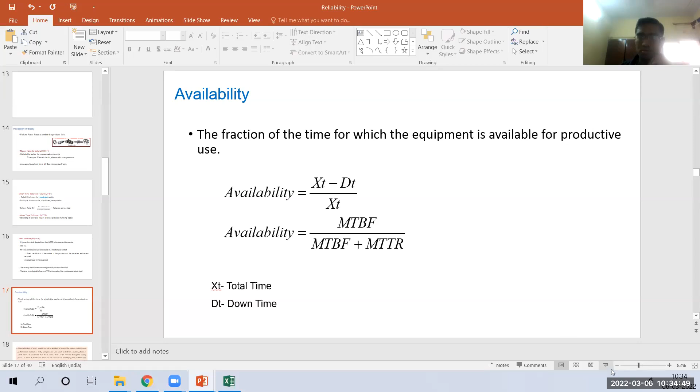Okay, so in our previous session, we discussed the maintenance aspect, and then we also discussed reliability, then the role of reliability in maintenance. That means how the reliability of the system is related with maintenance, and we also discussed the relationship that exists between reliability and quality, and also the role of maintenance planning in the other operations related to shop floor planning. That means it may be related with production scheduling, with quality, or with inventory.

So we have also discussed that maintenance, even though it's the responsibility of the maintenance department, has an effect on production, on quality, and on inventory planning as well. So there is a need for coordination between all these functions. Then it will result in good results as far as productivity for any industry. We also discussed the different measures related to the reliability indexes, that is MTBF, MTTR, MTTF.

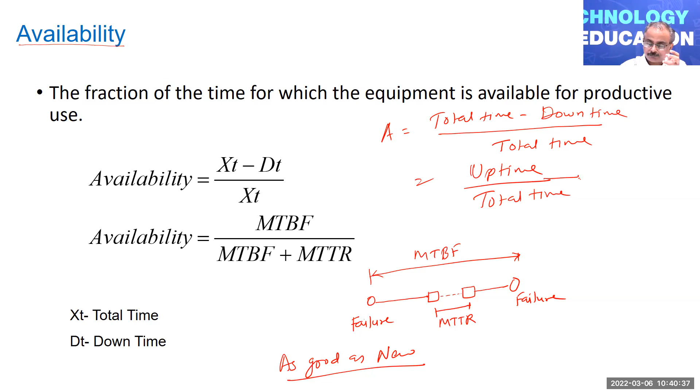Okay, so let's look at this example, and based on that, we'll see how we can evaluate the different measures that we have discussed up till now. That means the failure rate, then the MTBF and MTTR, and how we can evaluate the availability. So it's the example related to a wet grinder, and a manufacturer of the wet grinder tested its product to assess the various performance measures.

The 50 wet grinders were tested for a running time of 1000 hours, and it was found that there were a total of 60 failures during the testing phase. So 50 wet grinders were tested for 1000 hours, so the total duration of the testing was 50,000 hours. And out of those 50,000 hours, 60 failures were observed, and in total, 1,350 hours were lost on account of identifying the problem and restoring it back to the working condition.

So after the failure has occurred, the time that is spent on identifying the failure, we call fault identification, and based on the fault, the machine is repaired and restored back to its working condition. So based on this, now we will try to estimate these performance measures, in terms of the failure rate, the MTBF or the MTTR, and the availability of the particular machine.

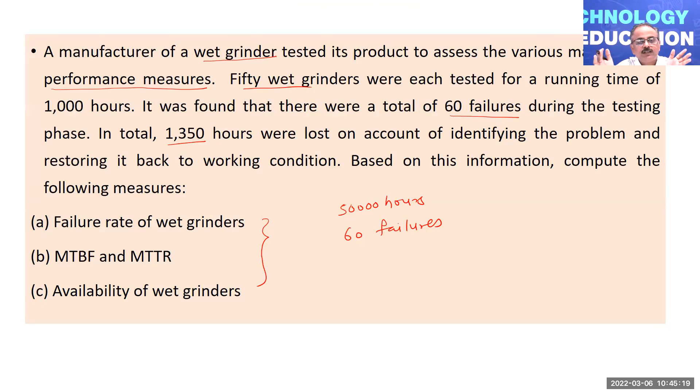Sir, in the formula MTBF, total time divided by number of failures, what is the meaning of total time? Total available time, or the total time including breakdown? So each of these machines is tested for 1000 hours. So the total time of testing was 50,000, and during those 50,000, there were 60 failures. So out of this total time during which the testing was done, total failures were 60.

So the mean time between failures is how much? It is 833. So on an average, after 833 hours, the failure has occurred. So the mean time represents the average time. Total time of the testing is 50,000, and in those 50,000, there were 60 failures. So on an average, after 833 hours, there was one failure, and that represents the mean time between failures for that particular component. Okay, understood, sir. Actually, the doubt is, is it the available time or is it the total uptime of that particular available time?

Which one? 50,000 hours. This total, yes, sir, 50,000 hours. 50,000 hours is the total time. In that case, MTBF should have the formula total uptime, sir. Like total uptime in the sense, whatever 50,000 hours minus that 60 failures are there, no, sir? That we have to go, I think.

So 60 is the number, okay? 60 is the number, but with respect to the 60 breakdowns, there will be some breakdown hours also, no, sir? So total available time minus breakdown hours divided by number of failures should be the MTBF formula, actually. No, but then the time during which the failures occurred, and based on that the repair is being carried out, that will be accounted separately in terms of the MTTR. Okay. So MTTR is included as a part of MTBF. That is correct, sir. That is the repair time divided by number of repairs.

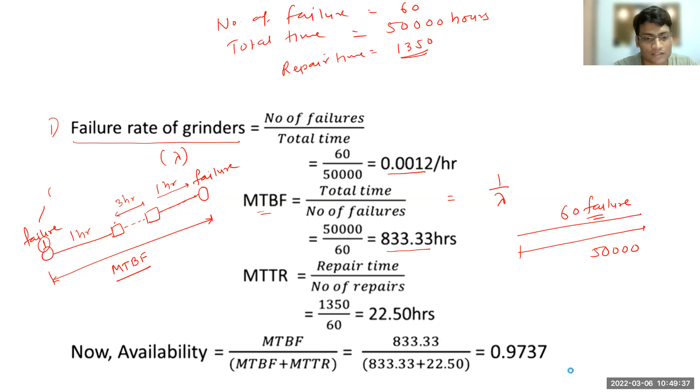Yeah. Okay, so you will consider this total time because MTBF is nothing but the time between the two failure events. Okay, and during the operational period, my machine was operating only for 1 hour. Between two failures, my machine was operating only for 1 hour. So that is why we were thinking it should be 1 hour only. That was our analogy. This is your operating time wherein there is no failure.

Okay. If your machine is operating for 1 hour, see, when you say between failure, what do you mean by it? The time span between two failures. Isn't it? So this is the first failure and this is the second failure. So the time between the two failure events: whatever failure has occurred, you will rectify that failure, you will repair it, you will restore the machine. Again your machine will start operating. After that, the next failure will occur. This time we are considering as the time between failure.

And over the operational period, let's say over a period of 1 month, you will have a number of failure events, isn't it? So you are interested to know the average time between failure, or mean time between failure. So whatever is the total duration for which the machine was operating, and during that duration how many failures have occurred, based on that you will find on average the time between failures. So that time we call the mean time between failure. Okay, if you are considering only the uptime, during uptime there is no failure.

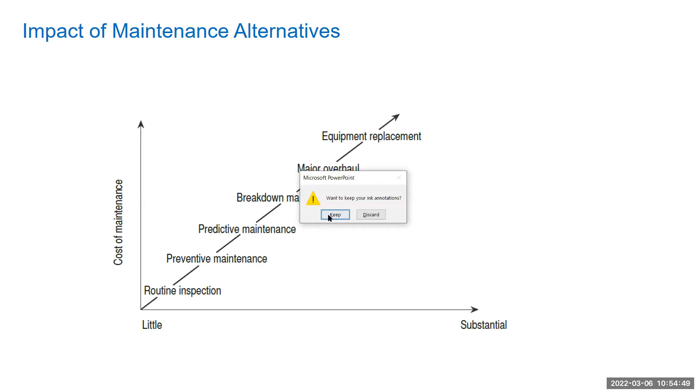Okay. So since we are from maintenance, sir, what we generally do is consider only uptime for calculating MTBF. So that's a bit of confusion actually. Since you are saying available hours, we are considering it as uptime. No, when you say the time between failures, it's over a period of time. So it is nothing but the average time.

So over a period of time, whenever a failure occurs, you will have to restore the machine and bring it back to operating condition. Again, the machine will start its functioning. So whatever operation period you have considered, let's say you operated the machine for 1 month with an 8-hour shift, if you want to know the mean time between failures of that machine, whatever number of failures have occurred over that period will be considered for estimating the mean time between failures. Time to repair.

So even whatever intermediate failures have occurred over a period of time, those failures will also be included. Okay, so we will be interested in knowing the MTBF based on this: here the failure will occur, so basically we consider it as a fault. The fault has started, after that it is identified,

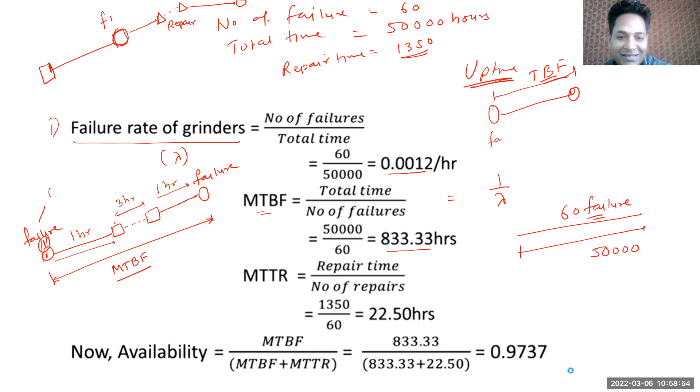Actually, I am also working in a maintenance department in Honda. So we calculated the same way, uptime divided by number of failures. Actually in the SAP system, we have put the same formula. So all our reports are made by this calculation only. So now we are confused. Since you are taking it as total available hours, we are considering only total uptime, sir, actually.

So total hours, why? Because between failures, since the machine has stopped for 3 hours, those 3 hours we are not supposed to consider, no, sir. So only whatever is available, like 24 hours minus 3, 21 hours, those 21 hours we have to consider, I feel, sir, for between failures. Because for the past 8 years we are doing only this, sir. Now we are also following the same as explained, but so we don't get a zero value, we add +1 in the denominator.

Okay, so, but then, okay, I will check the literature again because as far as I know, when we are saying the mean time between failures, over a period of time, whatever failure has occurred, the machines will be restored. And based on the restoring, the machine will again start operating its function. So over a period of time, how many times the failure has occurred will be based on the time that you have considered, and on average, how many failures have occurred during that period. So uptime will include only the failure-free operation of that particular machine.

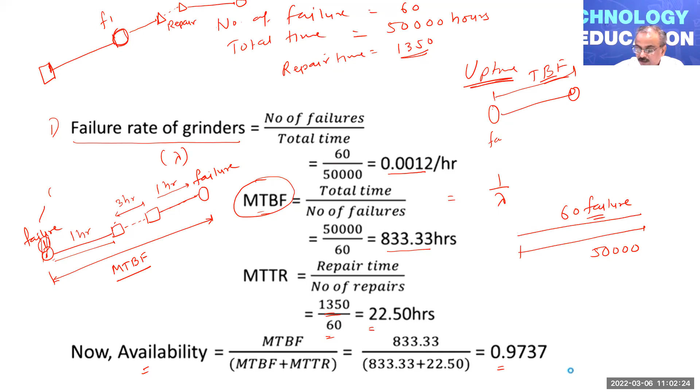So all these are related to the effectiveness of the maintenance function: to what extent the maintenance has been carried out, how it will affect the failure events, which impact the mean time between failures; based on maintenance effectiveness, what kind of fault occurs, and what the severity of that failure will be, which determines the repair time involved, and to what extent the machine will have uptime. Based on that, we can get the availability of that particular machine.

Sir, in aluminium die casting, when the machine breaks down, the temperature of the die and the metal goes down. When the machine is rectified after the failure, the maintenance person says the machine is okay from my side, but production says the machine is not okay because the temperature has not been reached yet. Then in this case, whose mean time to repair will be considered?

If we see from the perspective of production, the machine is not available, but from the maintenance side, the machine is available now. Then see, in a typical die casting operation, for the first piece to become 100% okay, which will meet the entire specification, there is reheating of the die and attaining the required parameters related to the process aspect. So in that particular case, till the time you have restored the machine, that should be included as MTTR.

Because heating of the die, attaining the required temperature, and then meeting the entire specification of that aluminum die cast component, will be a part of the process. So that will not be a part of your role as maintenance, because it's a part of the process. So even if the machine has not failed, if you stop the machine and start it again, the moment the machine is started, it will not give a 100% okay component which meets the entire quality specification for that particular component.

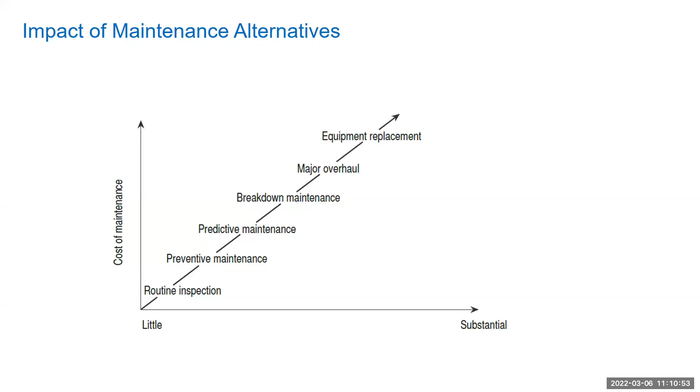Okay, from the production point of view, they will require the workable condition of the machine by which they will produce it, but then it should be accepted by the quality people.

Okay, sir. Thank you.

Okay, so we can see the effect of the different maintenance alternatives that we have seen. So there are different maintenance alternatives. We can start with the routine inspection, wherein we can just inspect the machine and do some kind of cleaning or greasing and lubrication. So you can see that the impact increases in this direction, wherein the cost is also increasing.

So the routine inspection, then the next level will be the preventive maintenance, which will have some more impact than the routine inspection, but of course it will involve some cost. Then the predictive maintenance, wherein you will have some more maintenance in terms of condition monitoring, and based on that you may have to do some kind of the

condition parameter, and based on the observation of the condition of the machine, based on certain parameters, it may be some kind of a noise, temperature or vibration, but of course it will involve a lot of sensors. So definitely you will be able to predict the condition of the machine, and based on that you can take some corrective action. So of course that will also increase in terms of this.

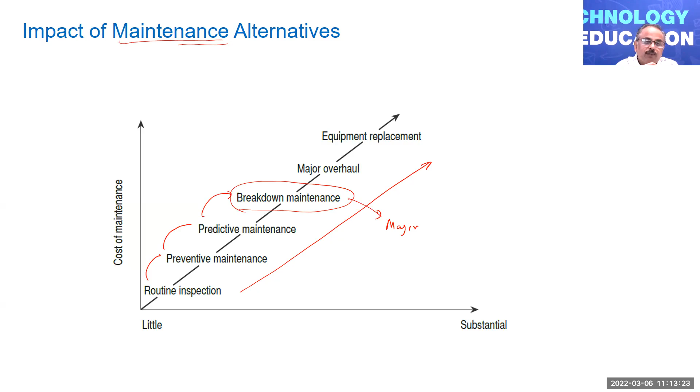The next level will be the breakdown maintenance. So here we are considering that based on the breakdown maintenance, we are doing some major replacement of the component. So in this particular major breakdown, we are not looking at the repair. Okay, we are looking at replacing the component, so that there are many components which will be new components in that particular machine, and based on that it will give the required performance.

So we can say here that replacement of the components is occurring during that particular breakdown, and based on that we will improve the condition of the machine, so that it will have more cost in terms of the replacement of the component.

Then if you are doing the major overhaul of the machine, definitely in that case many components will be replaced, so more and more new components will be involved in that particular machine. So it will have a substantial impact on the performance of the machine, and based on that you will get a good availability, but of course that will increase the cost of maintenance.

And finally we can say that if we are replacing the equipment, then definitely, because over a period of time we can see that the cost of maintenance increases, whereas if you look at the depreciation, considering the depreciation, if you look at the salvage value of that particular machine, it goes on decreasing. Okay, so over a period of time you will see that the operation and maintenance cost increases, whereas the value of that particular machine decreases.

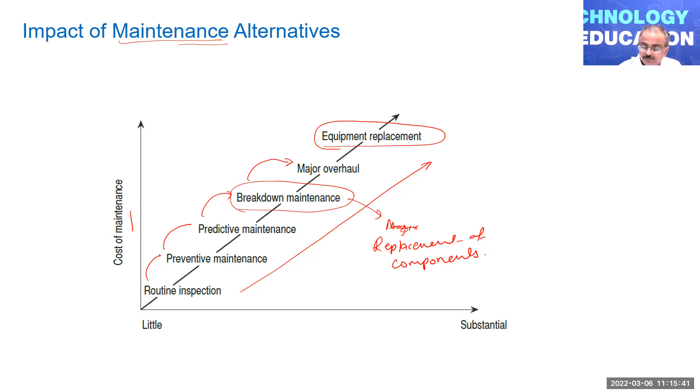So you can see that with this particular level of maintenance, if you go on increasing the level of maintenance, your cost will increase, but then you will get a good amount of productivity in terms of the availability of the machine, and maybe it will result in improvement in the productivity. Okay, so this bathtub curve we have already discussed.

So if we consider the downtime analysis, any downtime will not just involve the active downtime, it should also include the other downtime that is associated. Okay, so many times we consider the MTTR to be only the active downtime during which the machine is under maintenance. That means the machine is dismantled and some kind of maintenance is being performed, and based on that maintenance, the machine is restored to the workable condition.

But apart from the active downtime or the active maintenance time, we should also include the administrative delay time as well as the logistic delay time. So administrative delay time will include the point at which the fault has occurred, reporting to the maintenance function, then the observation by the maintenance people, and based on that, whatever fault has occurred is confirmed. Based on confirmation of the fault, whatever spare requirement or other logistic support is required will also be included as a part of downtime.

And after that, once the machine is dismantled and the entire maintenance has been done, that will be included as a part of the active maintenance time. So in any maintenance, whether it's corrective maintenance, preventive maintenance or condition-based maintenance, it will start with the fault identification and location. That means what kind of fault has occurred, then where the fault has occurred, and based on that, the other administrative and logistic support that is needed.

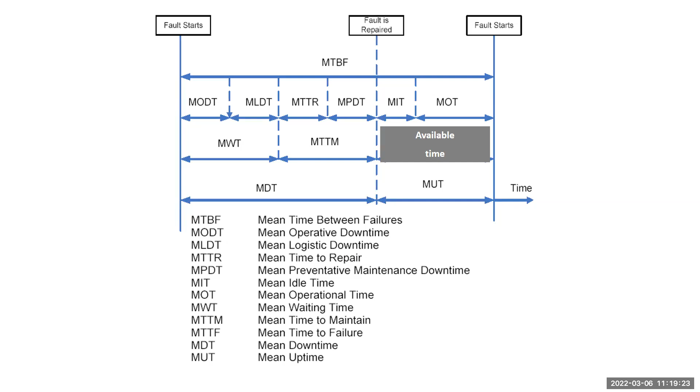Okay, so it may be a preventive maintenance or it may be a condition-based maintenance. So you can see that any downtime, when we consider the mean time between failure, includes these particular total times that we are considering. So the MTBF includes the mean downtime and the mean uptime.

Okay, so at this point the fault starts, and at this point again the next level of the fault starts. Okay, so the time between these two is nothing but the MTBF.

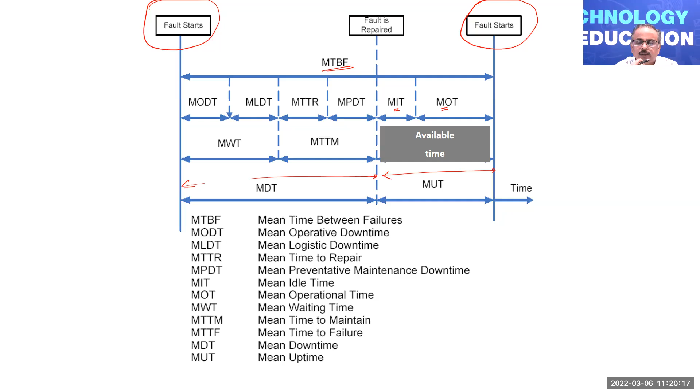So the mean uptime, when we say, includes the mean operating time and mean idle time. So during that particular phase, for any setup change, if the machine is idle, or let's say non-availability of the material, or if anything happens, that will also be included as a part of your uptime. So the mean idle time and mean operating time will be a part of your mean uptime.

And now in mean downtime, there will be two components. One will be the mean waiting time, and the second will be mean time to maintain. Because after the fault has occurred, the maintenance people won't immediately rush to the machine and start dismantling it. So there is some time, which may be related with the administrative time, or it may be related with the logistics support time, if any spare is required, whether that spare is available or not.

Because if any spare is not available, and the arrival of that spare is taking time, that will be a part of mean waiting time. So unless all the resources are readily available, the actual maintenance will not start. So this particular time we consider as the mean waiting time.

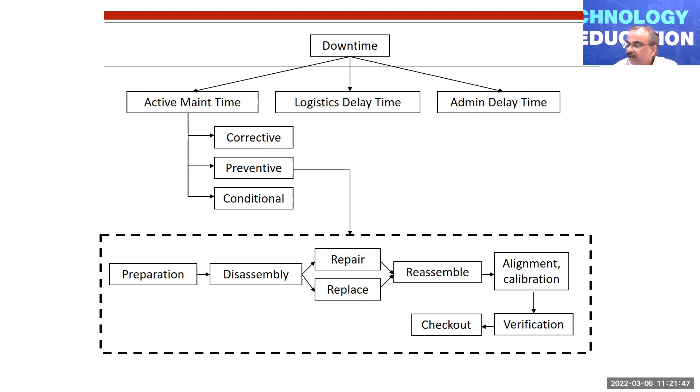And once all the resources required for the maintenance are available, then we'll start the actual maintenance, where you will start dismantling or disassembling the machine, do whatever repair or replacement is required, then reassemble it, do some kind of alignment, calibration, whatever is required, verify the machine, and make it ready for production, so that it will be in a workable condition and the products which meet the quality specification and are acceptable to the customer will be produced. So that will be a part of mean time to maintenance.

So it will include the mean time to repair, and it will include the mean preventive maintenance downtime. So this mean time to repair will include any intermediate repair or adjustment if required, and if any preventive maintenance is being done, that may also be included as a part of your mean time to maintenance.

Okay, so this total downtime will have so many components. So you will have to look at which component is increasing. That means it is causing more downtime, by which the performance is being affected, and based on that you may take some corrective actions.

So you can see that when we say the uptime or the downtime, there are so many components included in those which should be looked at, so that it will improve the performance of the maintenance, and based on that you can improve the productivity of the particular manufacturing operations or functions, or improve the performance related with the availability, uptime, downtime, or the other performance measures that are looked at in any manufacturing function.

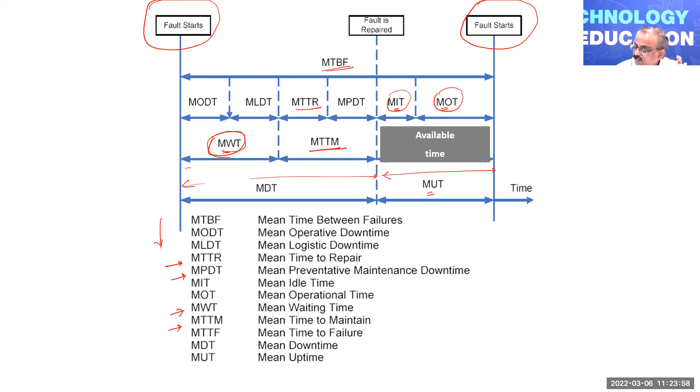So the availability of the data required for doing the analysis is based on a kind of information system. So the maintenance function should have an information system. That means for all the functions involved as a part of the maintenance, and whatever corrective actions or activities are involved, there has to be some system which will record all this, so that you will have data available, and using that data we can further improve the performance of the maintenance function.

So a good information system is required for the efficient operation of the maintenance function, to arrive at the different parameters associated with the maintenance. For example, if you want to come up with a maintenance policy, whether it will be an age-based policy that we have discussed, a periodic or time-based maintenance policy, or another policy in terms of the repair limit, the failure limit, opportunistic maintenance or selective maintenance, whatever maintenance policy we want to adopt, we should have data available.

Because if we want to go for an age-based maintenance policy, in that particular case, we should have the failure history of the particular machine, showing which component has a certain age after which it fails. So that kind of analysis we are able to do.

So maybe based on that, we can come up with either an age-based policy, or maybe with the failure limit policy in that particular case, or which component is taking time for repairing. So if over a period of time the repair time of that particular component exceeds, in that particular case we can take a call that instead of repairing it now, we can replace the component, so that it will start a good performance.

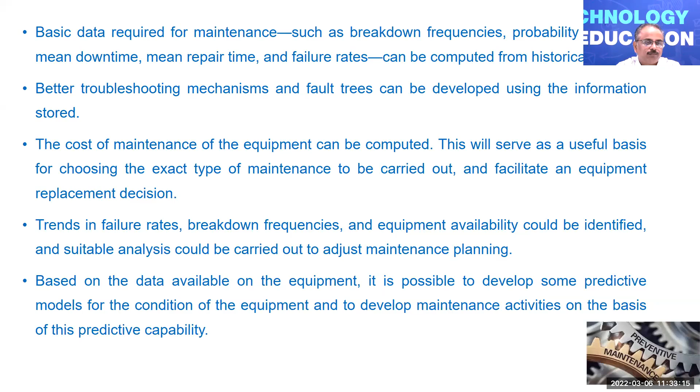It's 11:30, and after that we will resume the session, and we will look at the waiting line principle, because in machine maintenance, the machines will be undergoing maintenance, and a long queue is formed. So based on how much time the machine will spend, you can plan for the resources and do planning for your maintenance function. So we will look at how the waiting line concept can be applicable in machine maintenance after the break is over.

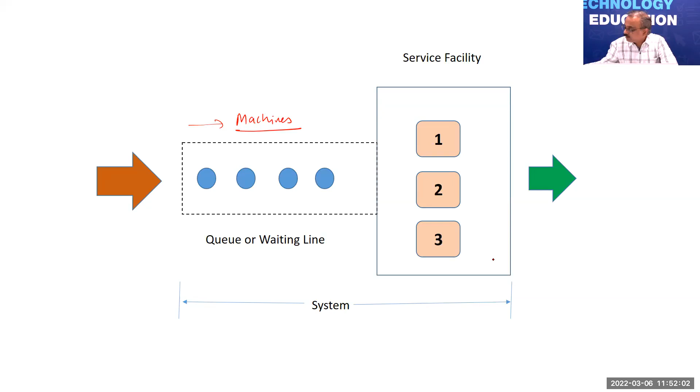Here there will be a number of customers arriving. For maintenance, the customers are nothing but the machines that will be arriving and available for maintenance. The service facility is nothing but the maintenance department, wherein there will be a number of service facilities available. It may be in terms of the maintenance people or the maintenance team. So depending on the organization structure of that maintenance department, you will have the number of service facilities available. So the machines will arrive at the maintenance function.

The machines, based on their failures, will form a queue, and based on the service given by the maintenance department in terms of the maintenance carried out, the machines in workable condition will come out of this queuing system. So we can analyze the number of machines waiting for service in the maintenance function as a part of waiting line or queuing theory.

And based on that, we can decide how many machines are waiting and what will be the time that will be spent by the machine in the system. So all these we can evaluate.

So for any waiting line, there will be 3 elements involved as a part of the queuing system. The first will be the customer who will be arriving at the service facility, that means here the maintenance function. There will be a queue formation, because based on the arrival of the customers the queue will be formed, and there will be a service channel, which is nothing but the maintenance function. So depending on these 3 elements, we can analyze the maintenance as a queuing model.

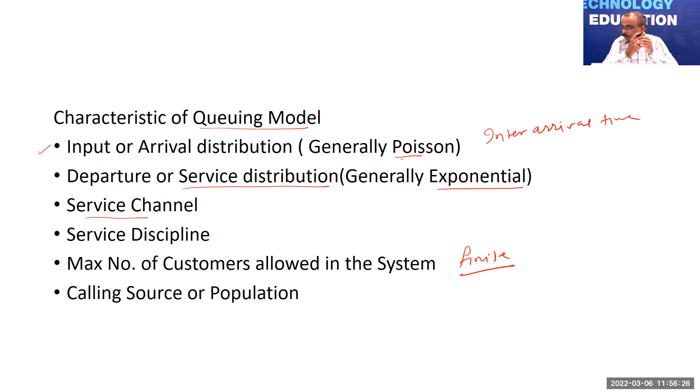In queuing theory or in a waiting line, an infinite number of customers may be allowed. For example, if you consider any bank, or any reservation system at a railway station, or even a dispensary where the doctor is giving the service, the number of customers arriving at the service facility will be from the infinite. So that is the maximum number of customers allowed, and then the calling source or the population.

So from where the customers are coming, again it will be finite or infinite, from which population the customers are coming. In case of maintenance, whatever number of machines are available in that particular organization, those will be coming for maintenance. So the population we are considering here will be the number of machines in the company, and in that case it becomes a finite population. But in other situations where the customers come from an open population, we consider it an infinite population.

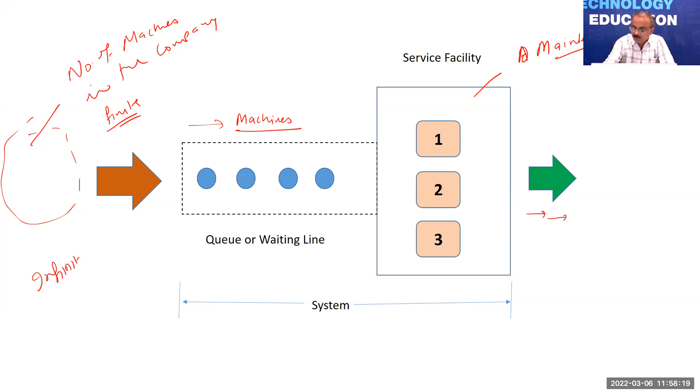So depending on the combinations of all these parameters, there are different models that exist for the waiting line, and based on that, we can have different formulations of the waiting line. We will consider this multi-channel system wherein a number of machines will be arriving, and based on the number of facilities, the machines will be maintained, restored, and then sent again to the production function.

So in that particular case, lambda here is the arrival rate, and mu here is called the service rate. So this lambda is based on the Poisson distribution, and this mu is based on the exponential distribution.

So based on the values of the lambda and the mu, that is the arrival rate. For example, in case of, let's say, the machine shop wherein the machines are operating, and based on that, the machines are getting into the maintenance department. So on an average, we can say that the arrival rate is, let's say after every 1 week, or let's say after every 10 days, one machine is arriving for the maintenance. So it's called the average time, or we can call it the mean arrival rate of that particular service channel.

Similarly, the mean service rate, that means how much time is being taken on an average to provide the service. So that is being considered as the service rate, which we call the mean service rate, and this we call the mean arrival rate. So this utilization factor is nothing but lambda upon mu, that means arrival rate divided by the service rate.

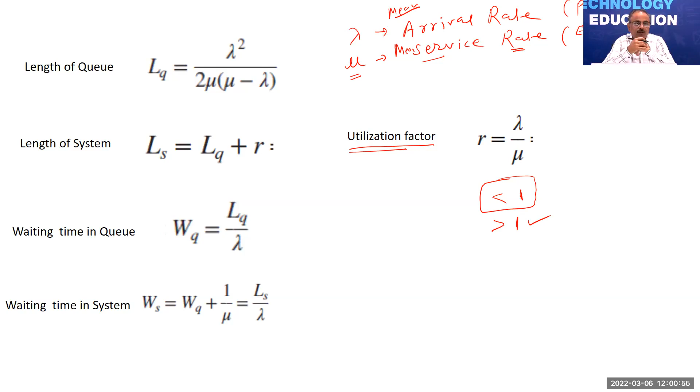So you have to ensure that the utilization factor should be less than 1. In that case only, it will result in less number of customers in that particular queue. Otherwise, if it is greater than 1, then it will result in an endless queue. So based on that, you'll have to take measures by which you can increase the service rate. Maybe you can create a few parallel facilities to improve this utilization factor and bring it back to less than 1, so that it will become a finite queue length. Otherwise, it will become an infinite queue length.

So based on the mathematical analysis, the length of the queue that is formed will be given based on what is the arrival rate and what is the service rate. So this will be the queue, and this will be the system. The queue will include the number of customers, in this case the number of machines which are waiting for the maintenance, and the system will include the queue as well as whatever machine is under maintenance. So that will be considered part of the system.

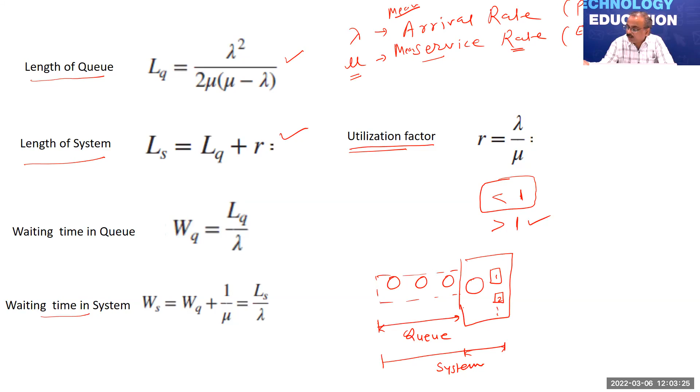So in any queuing line, we are mainly concerned with these 4 important measures: length of the queue, length of the system, waiting time in the queue, and waiting time in the system. And of course, what is the utilization factor for that particular service channel or service system. And we have to ensure that the utilization factor is less than 1. Otherwise, it may result in an infinite queue length.

Okay. So let's consider this example, and based on that, we'll see how we can estimate these different elements related to the maintenance function, applying the queuing line or waiting line theory. So a machine shop has several multi-purpose machine tools, and the arrival rate is 1 every 18 hours. So this is the arrival rate. So on an average, after every 18 hours, 1 machine arrives for maintenance.

The MTTR is estimated to be 14 hours. And the MTTR, that means service rate, will follow the negative exponential distribution, and the arrival follows the Poisson process, because the arrival pattern is normally a part of the Poisson process. Because there will be intermittent arrival of the number of facilities or the number of customers

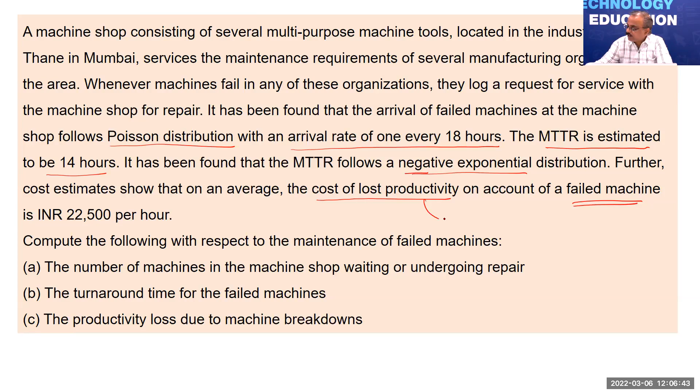So that we consider as the consequence of the failure. The consequence of failure will result in the maintenance cost, which we consider a direct cost, but it will have an indirect cost in terms of the cost of lost productivity, or we call it the cost of lost opportunity also. Here it is given, which is 22,500 per hour.

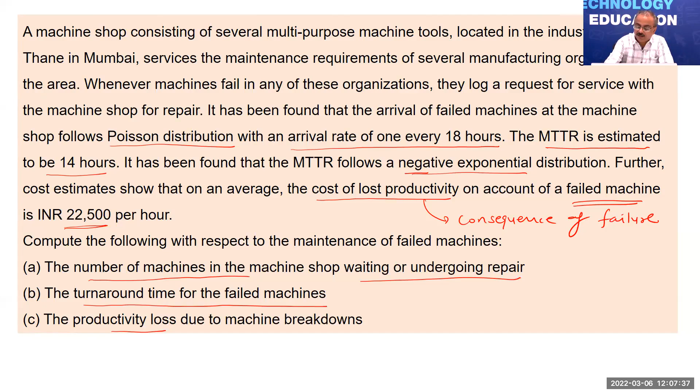Okay, so based on that, we can find out the number of machines in the machine shop waiting or undergoing repair. Then what is the turnaround time for the failed machines, and what is the productivity loss? That means whatever time the machines are under breakdown, how much loss will incur in terms of productivity. So we can utilize the waiting line or queuing theory principles, and based on that, we can find it out.

So in this case, the arrival rate lambda will be equal to 1 upon 18, which is 0.056. The service rate is mu, that is 1 by 14, that is 0.071. And the utilization is based on lambda upon mu. So you can see that it is 0.7887, which is less than 1. That means it will result in a finite queue length.

So we have to ensure that whatever the arrival rate and service rate, it should result in a finite queue length. Otherwise, if this gets greater than 1, then it results in an infinite queue length. So the number of machines waiting for repair means the length of the queue. The length of the queue is given by lambda square upon mu into mu minus lambda. So there are 2.94 machines waiting for repair.

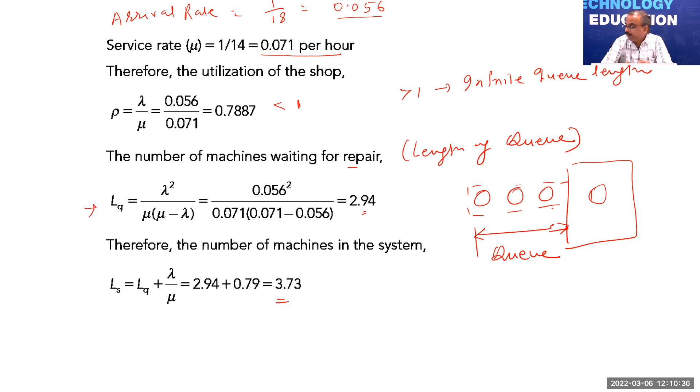So the turnaround time will be 66.61 hours, and based on that we can estimate the productivity loss, because per hour productivity loss is 22,500. So based on that, we can evaluate that the productivity loss is almost 14,98,000.

So based on these estimates, we can look at the performance of the maintenance function, maybe in terms of either improving the maintenance so that the arrival rate will change, or we can improve the service rate so that we can have a less turnaround time, so that it will result in less productivity loss as far as the particular maintenance function is concerned.

So the point here is that this waiting line theory, or the concept of queuing theory, can be applied to the maintenance function, and based on that, we can improve the performance of the maintenance. That will result in improving the productivity also.

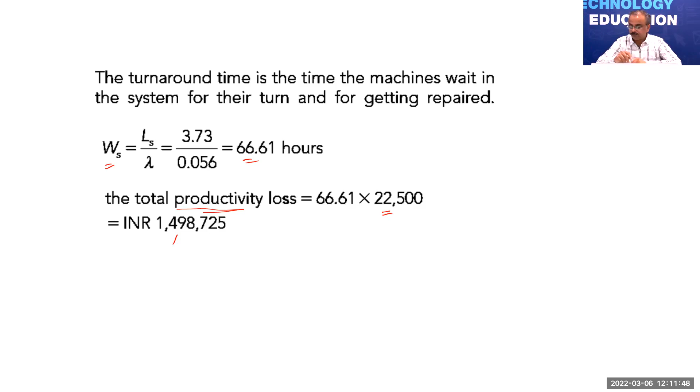Okay. Is this clear, or if any doubt, really, you can ask.

Okay, so that was about maintenance using the queuing theory or waiting line theory, so that the maintenance performance can be improved in terms of improving the maintenance effectiveness itself, so that will result in less failure, so that the arrival rate will change, or improving the service in terms of arranging the resources so that the service rate can be improved,

so that it will result in reducing the number of machines which are waiting for the maintenance, or the turnaround time for the machines, so that it will result in less productivity loss for the machines which are involved.

Okay, so now we will look at one of the important aspects related to maintenance, which is very popular in many industrial organizations, that is total productive maintenance. It involves three aspects: total, productive, and maintenance.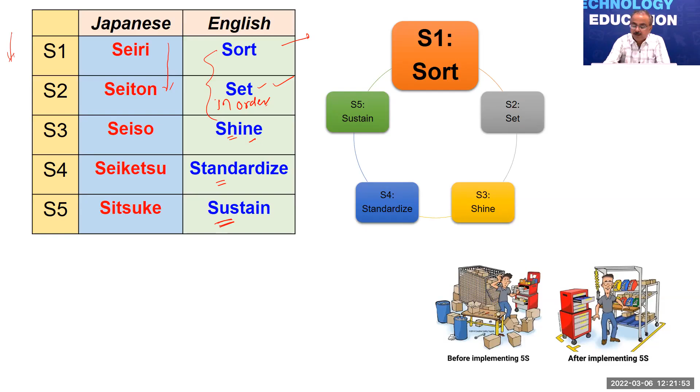So in any total productive maintenance, the first step is the 5S: we first organize the work environment, and with that organized work environment, we can apply the different pillars created for total productive maintenance. Okay, so the first pillar of TPM is autonomous maintenance.

Autonomous maintenance means the operators should be trained so that they do the routine maintenance like cleaning, lubricating, and inspecting, the basic aspects, because when the operator goes to the machine, that machine has to be cleaned, lubricated, and inspected first. All these are part of autonomous maintenance. It should not become only the responsibility of the maintenance people to clean the machine, lubricate it, and inspect it.

The operator who is working on that machine, if we train that person in these activities, so before starting the machine, if he is doing these kinds of routine inspection or routine maintenance activities, that will become a part of the autonomous maintenance. So TPM is based on some human aspect, because if we try to give the ownership of the equipment to the operator, that will become a proud feeling for him, because we can see that if we own something, we try to do it in a better way.

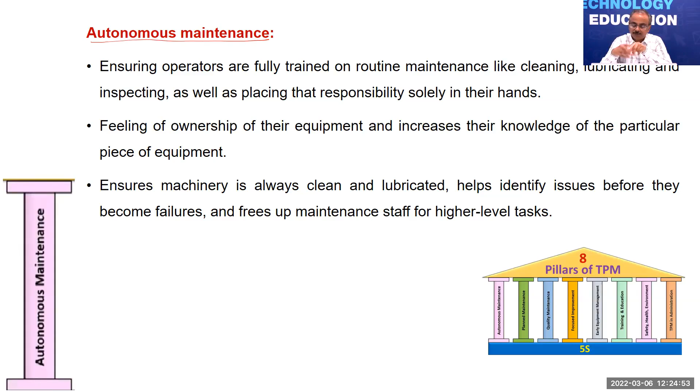The second pillar is about focused improvement. As far as the Japanese concept is concerned, continuous improvement is called Kaizen. So as a part of the Kaizen activities, whatever small improvements can be done, if those are identified and implemented, that will improve the performance of the machine, and that will improve the performance of the system.

So based on the brainstorming of the operators, based on the smaller teams who are proactively working together for increasing the improvements in the work environment, that will result in better productivity as far as the particular organization is concerned. So focused improvement is related with Kaizen, that is continuous improvement in the working environment, so that it will result in achieving higher productivity for the organization.

The third pillar is about planned maintenance. That means studying the failure rates, looking at the historical downtime data, and based on that, we can schedule the maintenance. So the maintenance has to be planned based on the historical data, based on the failure rate. It should not be that when the maintenance department has time, they plan for the maintenance. So depending on the failure rate, depending on the historical downtime, and based on the analysis of those failures and that downtime, the maintenance has to be scheduled.

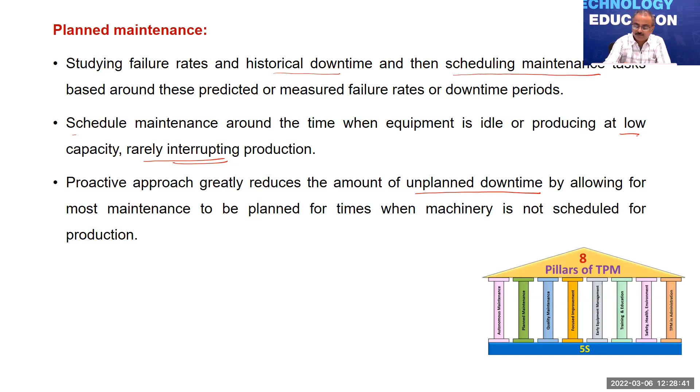The fourth pillar is about quality maintenance, and the focus is on design error detection and prevention in the production process. So whatever equipment is being designed, this is related with maintainability, because the design of the machine may be such that, for example, a small fault occurs, but it takes more time to dismantle the machine. So the concept is called design for maintenance, DFM.

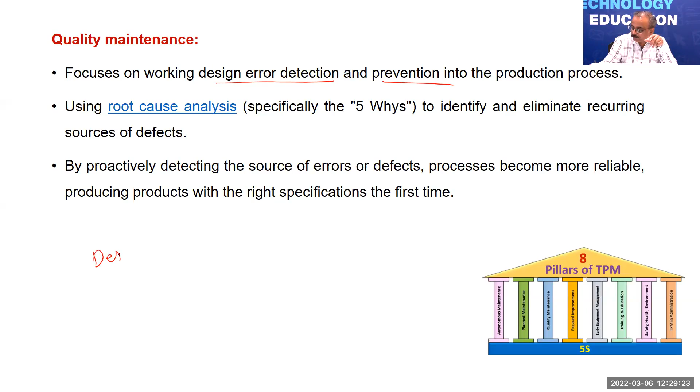So machine has to be designed from the point of view of the maintenance function also, because if it is taking too much time for dismantling, and if it is taking too much time again for assembling, that will result in more downtime.

Okay. So whenever we are looking at quality maintenance, we can look at what design errors are there and whatever faults are occurring. So we will try to prevent those faults, and based on that, we can have a root cause analysis, specifically what we call the why-why analysis.

Okay. So whatever fault has occurred, we can go into the depth of it to identify the root cause, maybe based on the 5 whys, which is called the why-why analysis, so that we can ask 5 questions in terms of why the fault has occurred. Based on the answer to why that fault has occurred, we can drill it down so that we can reach the root cause of that particular fault.

And maybe based on that, we can eliminate the recurring sources of those particular defects. So that is a part of quality maintenance that we have to look at as a part of the TPM approach.

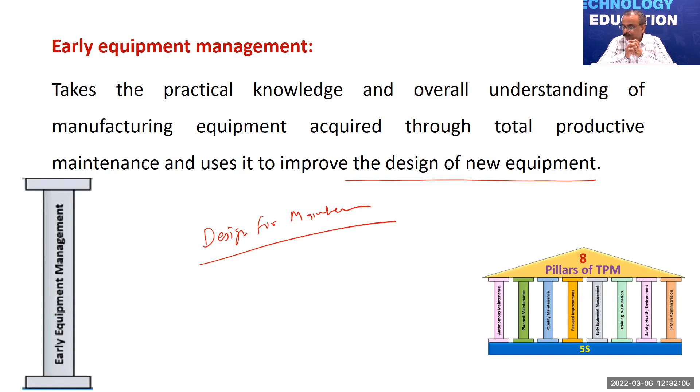The next pillar is training and education. So of course, all the operators, managers, and maintenance personnel who are involved should be trained to improve their skills so that they can proactively maintain the equipment and look at what the emerging problems can be. So the idea here is that maintenance should not be considered the role of the maintenance department only, but it should consider the involvement of all.

And when we are looking at maintenance, we do not just consider that whatever fault has occurred, we have to rectify that fault or prevent that fault. But based on the knowledge that is gained, we can look at how we can improve the design of the particular machine.

And of course, whatever corrective actions have been taken or whatever changes are being suggested, they should not have an effect in terms of safety, health, and environment. So maintaining safety, health, and the environment is also an important aspect of the maintenance function, because all the people who are working would like to work in a safe environment. They would like a working environment which will not have any hazardous effect on their health.

And at the same time, whatever actions are being taken should not affect the environment. So all those actions should be sustainable. So any solutions introduced as a part of the TPM process should always consider safety, health, and the environment. So it should not have an effect in terms of affecting safety. It should not have an effect in terms of affecting health or the environment.

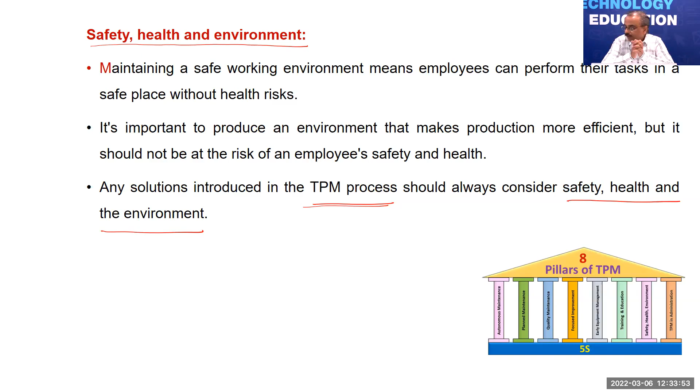So you can see that TPM looks at all the dimensions as far as the organization is concerned, and at the same time, it should look at administration also, because we have seen that there are so many issues which are related to administration.

Because for example, if any machine failure occurs, but you have a long administrative process to first report that fault to the maintenance department, that means if it involves too much paperwork or too much authorization by different managers, it will increase the downtime of the machine.

So the TPM also looks into the administration and tries to identify the avenues by which the wastages in the administration process, that means whatever non-value adding activities are on account of the administration, can also be eliminated, so that it will improve the performance and result in improving the productivity.

Okay, so when we look at total productive maintenance, organizations are concerned with one performance measure that is called the overall equipment effectiveness, popularly known as OEE. So any TPM philosophy tries to look at how we can improve the overall equipment effectiveness, the OEE. And the basic objective of total productive maintenance is to maximize the overall equipment effectiveness.

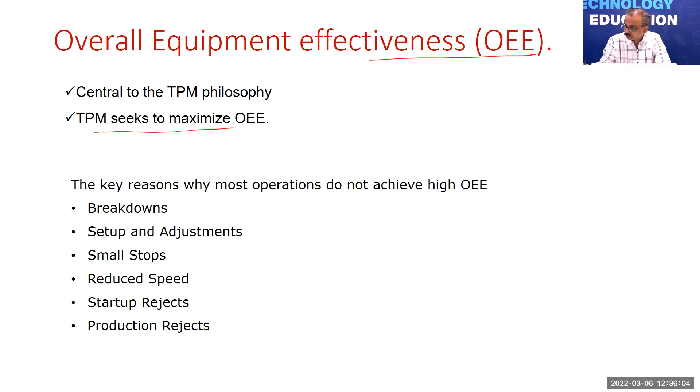So as a part of the TPM philosophy, there are 6 major losses which are considered as far as equipment performance is concerned. The first is related with breakdowns. Breakdown is a loss that will have an effect on the overall equipment effectiveness. The second is related with setup and adjustment. Whatever setup and adjustment needs to be done on the machine will result in a major loss to the performance of that particular equipment.

Then the minor stoppages or small stoppages, maybe because of some process adjustment, some other idleness, or because the material is not available. That will have an effect on the performance of the particular equipment. Then the reduced speed of that particular equipment. Then the startup rejects and the production rejects, the defects which occur during startup or during production. So all these are considered the 6 major losses as far as the operation of the equipment is concerned, and based on these 6 losses, the overall equipment effectiveness is calculated.

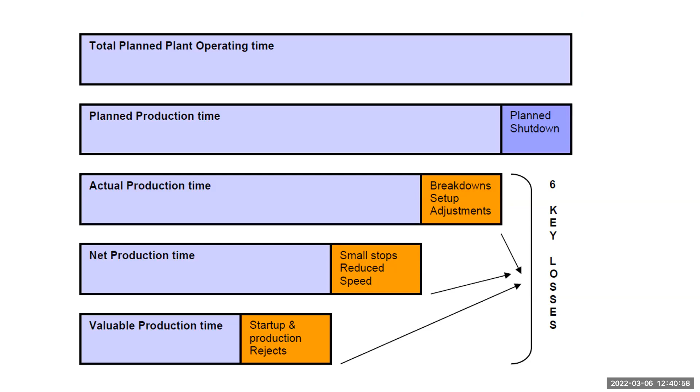So the idea is that we have to improve the process, improve the system, because one of the pillars you have seen is improvements, Kaizen. You should always look for continuous improvement. That's why you have to consider it as a loss and take measures through continuous improvement. Yes, sir, we can improve, but cannot eliminate. Of course. So OEE will never be 100%. You cannot have an OEE of 1, but you have to make it as high as possible.

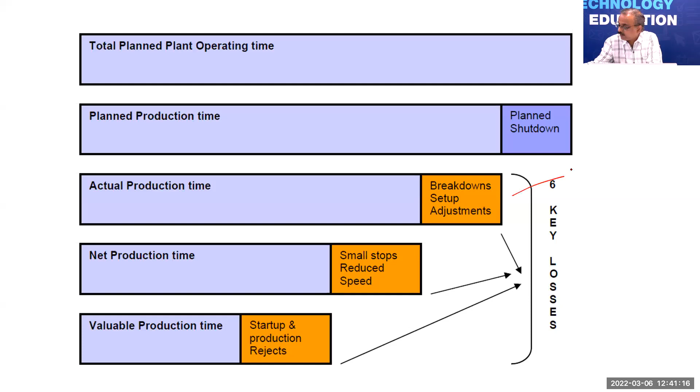So related with these 6 losses, there are 3 measures: the availability, the performance, and the quality. So based on these 6 losses, we have these 3 elements of the OEE, that is availability, performance, and the quality. So whatever the breakdown, setup, and adjustments.

Sir, do we consider the changeover time in calculation of OEE? Planned changeover? We'll come to that.

Okay. So if you consider the total planned operating time for the machine, in that case, you will have certain planned shutdown or the planned maintenance. So if we remove it, then based on that, you will have a planned production time. And from the planned production time, you may have certain breakdowns, setup, adjustment. So that will result in an actual production time.

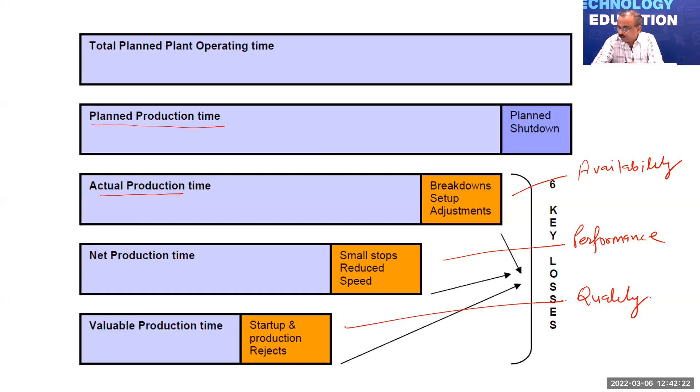Based on the actual production time, there will be certain small stoppages or maybe some events that may occur which will reduce the speed of the production. For example, let's say if any material is not available, so for some time the machine will stop. So that will reduce the production speed. So that will form the net production time.

And based on that, we have a valuable production time wherein whatever the rejections that have occurred, if we eliminate those rejections, that will become the value added product which we can deliver to the customer.

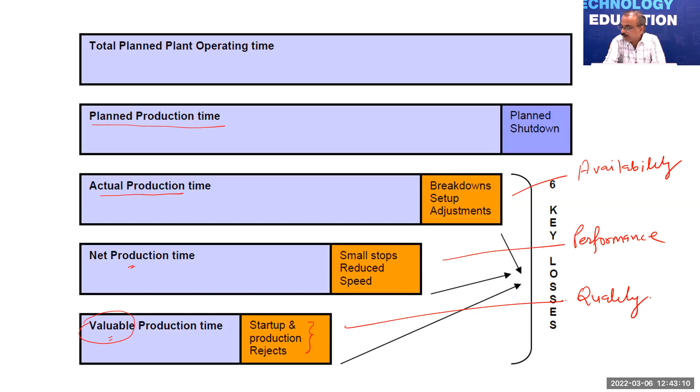So as far as any equipment is concerned, we identify these 6 losses, and based on that, we have the 3 parameters, that is availability, the performance, and the quality. And this OEE will be the multiplication of all these 3 factors.

Okay. So the 6 big losses we have considered. The first set of loss is related with breakdown and setup and adjustment. So that will result in the downtime losses, and the parameter related with the downtime losses will be the availability. That means how much time the machine is available for carrying out the production.

Then the next 2 losses, that is idle and minor stoppages, and maybe some reason by which the speed of the machine is reduced, maybe on account of non-availability of the material or some other reason. So that is related with reducing the speed, and whatever speed losses are involved, that will result in the performance of the machine. And based on the rejection, we will have the quality losses, and that will result in the quality.

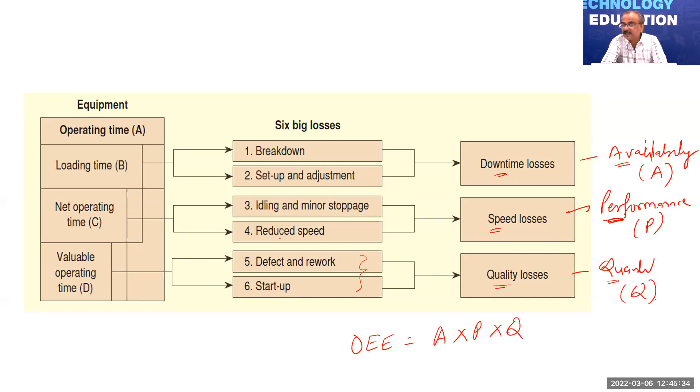Secondly, the performance. Okay, now whatever equipment is designed and manufactured, that equipment will have certain rated performance. And our objective when we are using that equipment is that we should achieve as close as possible to the rated performance of that particular equipment.

But then in real life, there are some idleness, some minor stoppages, or some reduction in the speed by which we are not able to get the performance. So the second aspect of the OEE, related with the performance, will try to capture this so that we can reduce the speed losses and improve the performance to as close as possible to the rated performance of that particular equipment.

Now, setup and startup losses are both the same, sir, or different? Which one? Setup and startup. So the startup are the rejections. This is related with the time loss. Okay. So whatever setup and adjustment needs to be done, that is a part of time loss, because ideally if we look at the operating time of the machine, we are expecting this much of the operating time.

This is ideal. So whatever is the operating time, it should give the rated performance and it should give the required quality of that particular product. Okay, so this is what is the ideal requirement. But in real life, you will have certain losses.

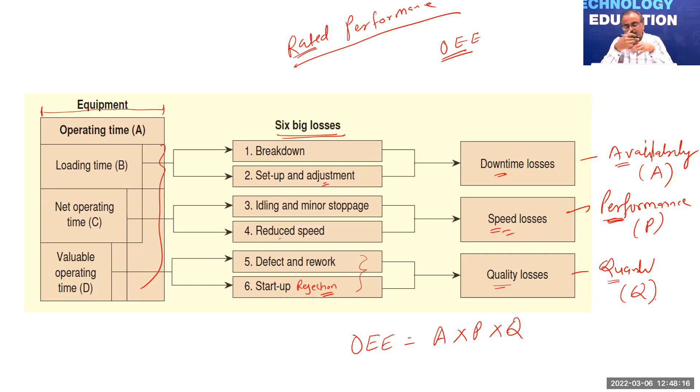See, as far as the equipment performance is concerned, the equipment is expected to give the quality at its first attempt. Okay, because if your rework is more, that will result in reducing the productivity, because you will incur the cost on reworking of those particular pieces.

Sir, but the machine is producing okay. In the next process, it is getting defected. At the machine stage, when the casting was produced, it was okay, and in the next process, in fettling or heat treatment, it gets bent, and we do rework to eliminate the bend. Will this be calculated in OEE or not, sir?

This is related with the individual equipment. Okay, so as far as that particular stage is concerned, if it is meeting the quality requirement at that particular stage, it will not be included as a part of the defect. Okay, because we are doing it for the particular equipment.

So whatever particular casting machine that you are considering, if it is not resulting in the defect, but provided that you should have an inspection which will certify that it is meeting the specification. Sir, how will rework be considered in OEE?

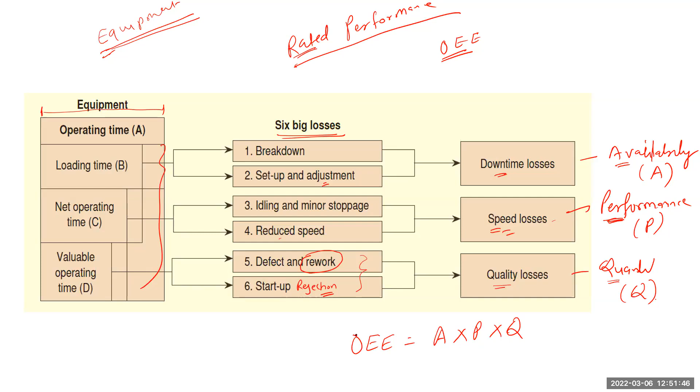So to achieve the required productivity, we should have all these three measures, and these three measures are captured in one performance measure that we call OEE. So the rejection may be during startup, the rejection may be at some intermediate stage even.

Okay, because even though it has occurred at the intermediate stage, if that particular machine is accountable for that defect, it has to be accounted as a part of the quality loss as far as that equipment is concerned. And you have to take measures so that the quality can be improved, and the rejection rate, the defect rate, or the rework rate can also be minimized.

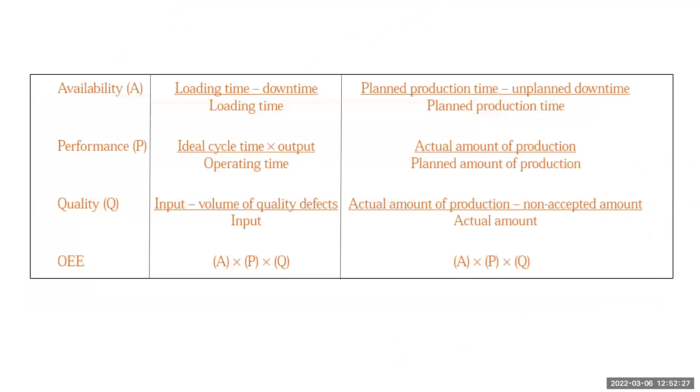Okay, so these are the ways by which we can measure these three major performance parameters of the OEE: the availability, then the performance, and the quality. Maybe in literature or wherever you will explore, you will find different formulas. Ultimately, it results in the three, that is availability, performance, and quality. And the availability is nothing but whatever is the planned production time and whatever is the downtime. So that means uptime divided by the planned production time will form the availability.

Then whatever is the actual output that you have obtained against the planned one. Okay, so whatever is the rated performance of that equipment, against that whatever you are getting, the actual performance, that will be captured in terms of the performance parameter, and the quality will be captured in terms of whatever is the total pieces that are produced, and out of those, how many pieces are acceptable. So that will form the quality aspect of that particular equipment.

And based on the estimation of these three, we can capture it in terms of the parameter that we call OEE. So if availability is 0.9, the performance is 0.9, and even quality is 0.9, when you multiply all these, the OEE gets to around 0.7. So when we want to improve the OEE, it's not just the improvement in terms of availability, performance, or quality alone. We have to take measures of improvement in all these so that it will result in improvement of the overall equipment effectiveness.

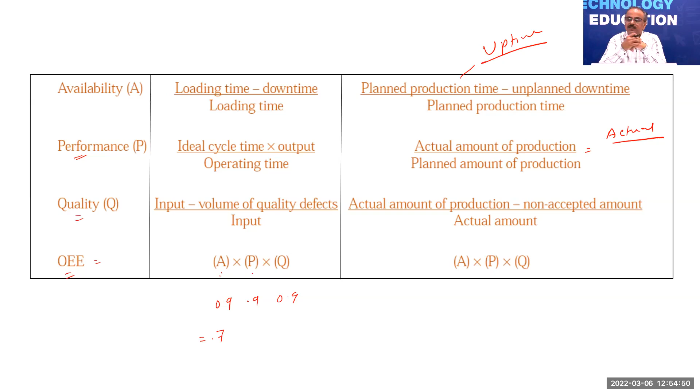So that's why the TPM philosophy looks at involvement of all for improving the performance of the equipment. And for that, it starts with 5S as the foundation, and it builds on the 8 pillars, which involve the involvement of all for improving the performance of the equipment in terms of the availability, the performance, as well as the quality of that particular equipment or process, which will result in improving the overall equipment effectiveness.

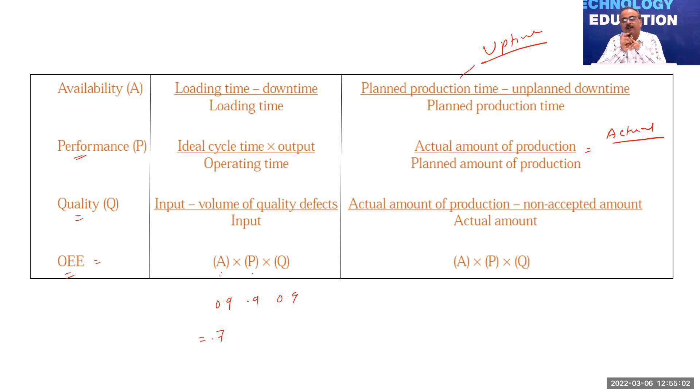Okay, so we'll take one simple example, and based on that, we will see how the OEE is calculated. So let's say in a typical shift of 8 hours, 480 minutes is the total time available. In that, we have 2 short breaks of 15 minutes, so 30 minutes are lost. There is a meal or lunch break of 30 minutes. And during the 8-hour shift, there is a downtime of 47 minutes. And the rated output of that machine is 60 pieces per minute. This is called the ideal run rate, the rated performance of the machine.

And based on the 8-hour shift operation, let's say these many pieces have been manufactured by the machine, and out of these pieces 423 pieces were rejected. So the good pieces will be the difference of these two. Based on that, we can estimate the overall equipment effectiveness of this particular equipment in this particular operating environment.

So the planned production time: whatever is the shift length, 480 minutes, out of that 2 breaks of 15 minutes and 1 break of 30 minutes we have to eliminate, which means we have 420 minutes of planned production available. Now out of that, what is the operating time? We subtract the downtime during which the machine is not available. Out of 420, 47 minutes are lost in the breakdown or failure of that machine, so 373 minutes are available. That is the operating time.

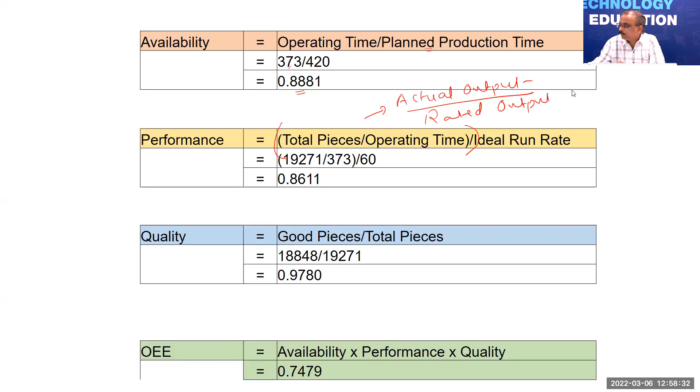So against the rated output, whatever the actual output, the ratio of these two will result in the performance. So if you look at this particular equipment, based on this total production that is obtained from that machine against the ideal run rate or the rated capacity, the performance is 0.86. And if you look at the quality, whatever the total pieces that have been produced, out of those 18,848 pieces were good pieces. So that indicates the measure of the quality as far as that equipment is concerned.

And based on these 3 estimates, we can see that the OEE is 0.7479. Now once we have obtained the OEE, then we have to look at how we can improve the availability. So the role of maintenance will come in that. By improving the maintenance effectiveness, we can improve the availability. So if availability is improved, that will improve the OEE. Based on the output, because there will be certain losses which will result in reducing the speed of the machine. Okay, so those losses we have to account, and based on that, we will have the actual output against the

rated output. So if we are improving the setup, because setup time is one of the major non-value adding times considered in the manufacturing scenario. And you can see that the industries try to achieve the single minute exchange of dies. Okay, so that is related with minimizing the setup time. If your setup time is taking 3 hours or 4 hours, this SMED principle says that you have to reduce it to that particular value. So setup and minor adjustment or any other reason because of which the performance is affected, those you can look at, and based on that you can improve the performance.

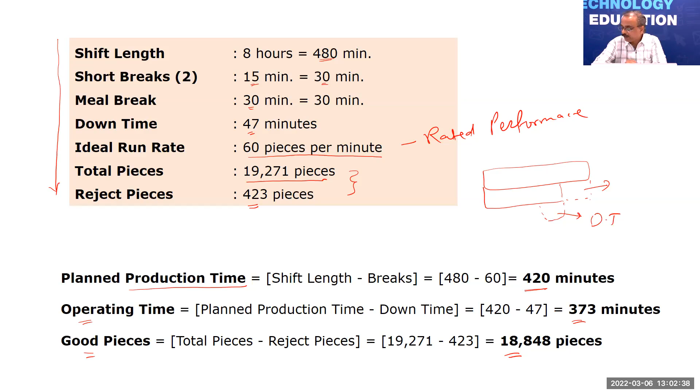See, you have the total time available for the shift. From that, you have the scheduled breaks: 30 minutes of short breaks and 30 minutes for the lunch break. So that time will be eliminated, and that will become your planned production time, during which you will operate the equipment and carry out the production. Out of that, the downtime of the equipment will be eliminated, and that will become the operating time during which the equipment will be operating.

Sir, next slide, please. Sir, operating, planned production, availability. Okay, sir. Total pieces. Sir, how is performance calculated? Total pieces divided by actual operating time, divided by the rated. So the equipment is designed to give certain rated output. Now in this case, the rated output is how much? 60 pieces per minute. Sir, here performance is calculated on the available time of the machine, which the machine is running currently? Yes, yes, yes.

Okay, sir, understood. So in this 373 operating time, you have produced 19,271 pieces. So this is the actual output per minute that you obtained. And what is the rated output? It is 60 pieces. So you have to take measures by which you can improve your output or performance so that you can reach as close as possible to the rated output.

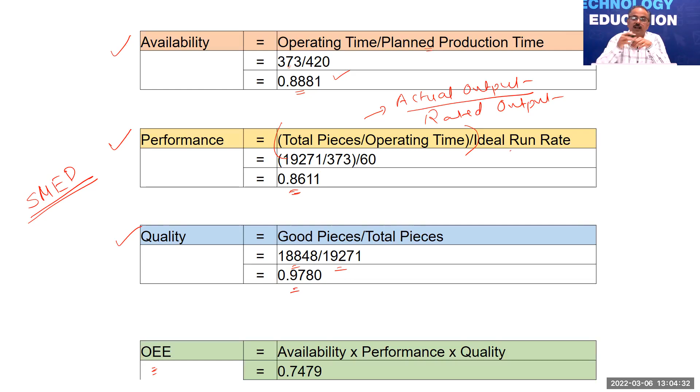Sir, considering the manufacturing industry in India, what is the average OEE at which we are working currently? See, the world-class standard says up to 85%, or 0.85, it can be. But of course, even 0.75 or 0.78. To improve the OEE beyond, we can say, 80%, you should have good availability, you should have good performance. So all these processes should be standardized. Then maintenance performance should be high so that it will result in high availability. So even 85% or 90% OEE is quite good OEE.

As per your knowledge, what is the maximum in India and which plant, if you have any? Even Maruti operates below 90, sir. Even Maruti operates below 90. That's what I'm saying, to achieve around the high 80s level. And even an OEE of 1 is not desirable. Sir, if OEE is 1, then there may be some mistake in the calculation or in the system. 99%, 0.99, or 0.98. 97 is max, sir. Yes, that's what I'm saying, even to that level it is not possible.

And it's not even desirable, because today's markets are so dynamic. There is so much competition, and even the life cycles are very short, isn't it? So from that point of view, 0.85 to 0.9 is a good or reasonable OEE. Because in today's market the life cycles are very short. So if you produce more and keep it as inventory, you increase the inventory, so you have to look at the demand, you have to look at the other aspects also.

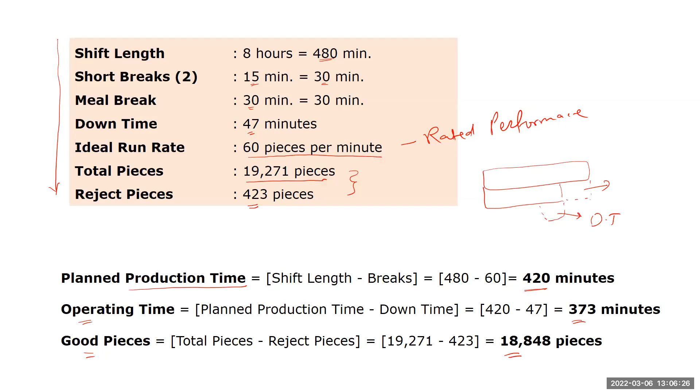Sir, will the changeover time be considered as downtime, which is planned changeover? Changeover is always planned. Which changeover? Die change. So that is planned. So that's a part of setup.

So when we say OEE, whenever your equipment is operating, whenever it's running, we have to find out the running state of the equipment. That running state should result in the rated output, and that rated output should meet the quality specification. This is the requirement in terms of OEE. So these are the three major requirements as far as the output of that equipment is concerned, and that we have to capture in terms of the OEE.

Is this calculation only for one single equipment, or can we do it for a complete assembly line, which includes a lot of equipment? We have to do it at the equipment level, but then either it may be averaged out over the entire line, or you may have some weights given to the individual OEEs. So depending on the relative importance of the particular equipment, you may consider certain weights, and based on the weighted OEEs you may come up with the overall OEE for that line. So similar to reliability in series?

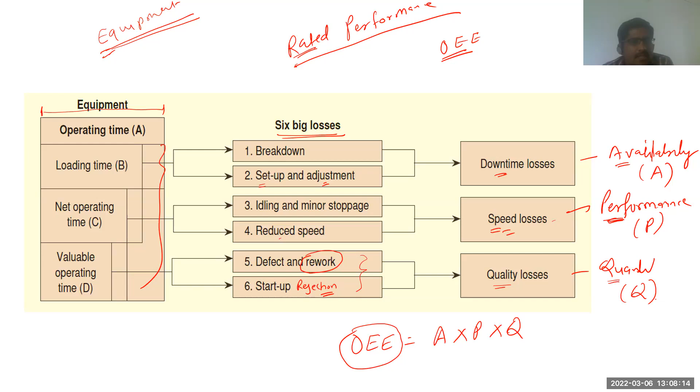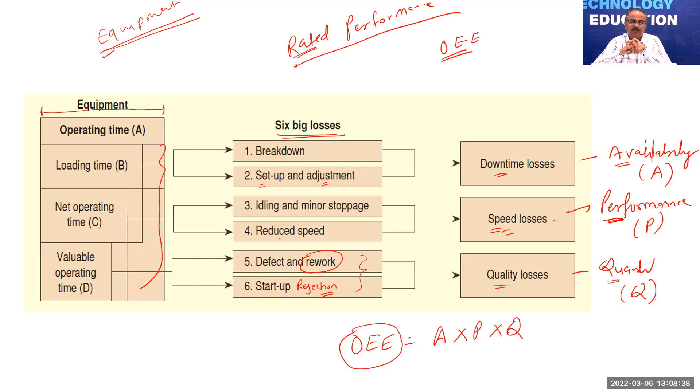So if the OEE of one equipment gets reduced, is there any chance for the complete OEE to drop? No, you cannot multiply it like that. It's not like the series system that we analyze. Either you consider the relative importance of the individual machines and take the weighted average as the overall OEE, or you may take the simple average. So this is about OEE estimation. So what is the full form of OEE? Overall equipment efficiency. Effectiveness. Overall equipment effectiveness. Okay, right.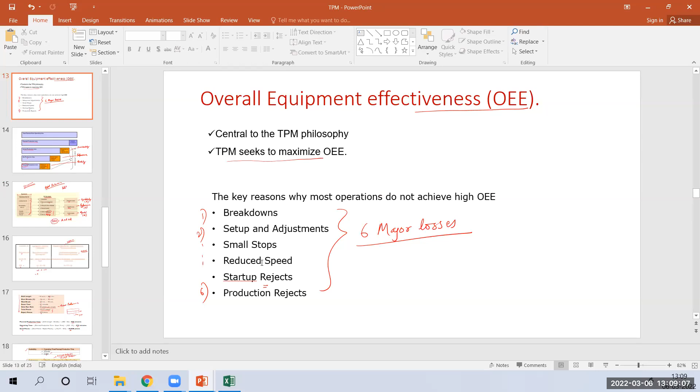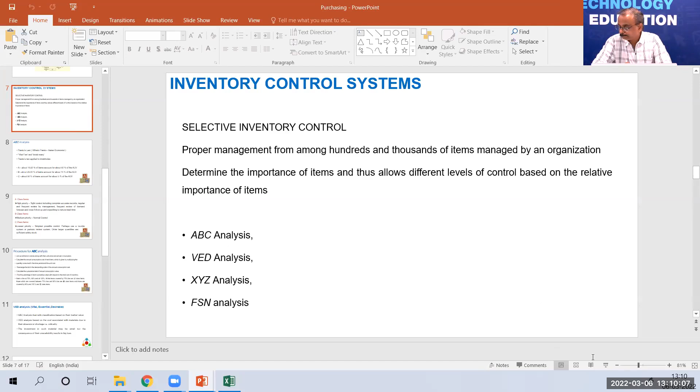Can we have 10 minutes? Okay. I just wanted to discuss purchasing and ABC analysis, which is involved in inventory control systems, because as a part of spare part management this analysis will be useful. So we can have a quick overview of inventory control and then stop the session. Can we continue? Yes, sir. Please. Today is the last session. Okay, I will share this slide.

So this is basically related to the purchasing function. There are different R's related to it. That means whenever we are purchasing material, it should be in the right quantity, the right quality, at the right place, at the right time, and at the right price. These were initially considered the 5 basic R's of the purchasing process. But apart from that, there are a few more that have been added.

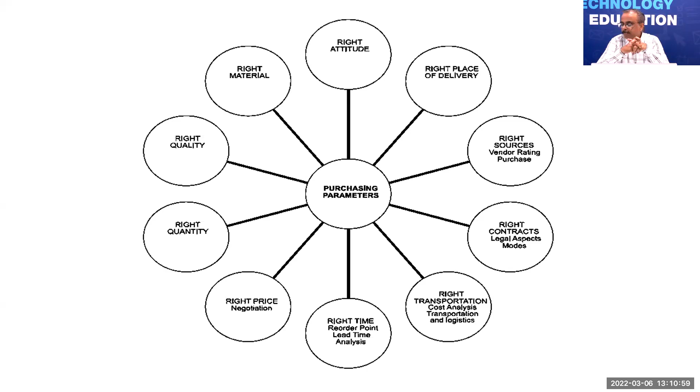That means it should have a proper contract, that is right contract, then right transportation, then the right attitude, right place of the delivery, right sources. So all these are considered to be the important parameters of the purchasing process.

So based on the material that is received, we have to utilize the control system for the inventory. So whatever material that we are keeping as a part of the inventory, we have to look at how we can have a control on these particular items, because each item will have a different usage value. Each item will have a different criticality.

And based on that item, we should be selective in terms of giving the importance, because in any organization, whether it's a raw material in the industry, or any kind of a spare existing in any maintenance department, we cannot have equal control on all, because each item will have a different value in terms of its cost, or in terms of its criticality.

For example, we have washers, we have nuts, we have nut bolts, and we have the other items which are having a very high value. So we should be selective from that particular point of view. So there are certain techniques which are considered to be the selective inventory control system, like ABC analysis or the VED analysis. So ABC analysis looks at the classification of the item based on its usage value.

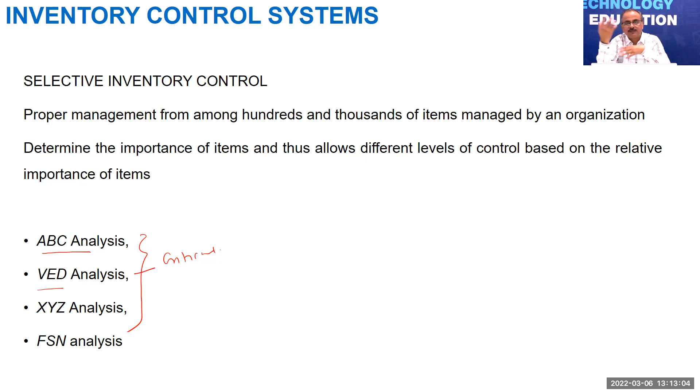Another classification is called the VED analysis, which looks at the items from the criticality point of view, because even though the item is small, it may sometimes be very critical. For example, somebody pointed out about the die casting machines. In those die casting machines, even though the price of the seals may be very, very low, if it results in decreasing the pressure, it will have a very high consequence. So from that point of view, the criticality may be very high.

So we can have the classification in terms of the VED analysis, that is vital, essential, and desirable, or in terms of the demand of that particular item, which may be XYZ classification, or in terms of how the items are being consumed, that is fast moving, slow moving, and non-moving, depending on the consumption of the item. So in any organization, whenever we are carrying the inventory, we should have some kind of a selective control on the items which are being kept in the inventory.

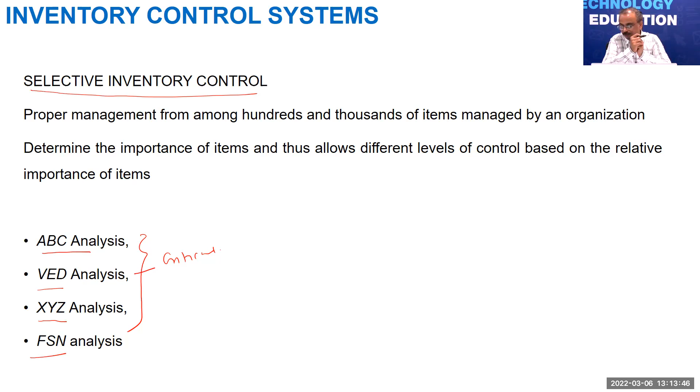So we look at the ABC and VED analysis, which are quite popular. As we have already discussed, the ABC analysis works on Pareto's law. Pareto, an Italian economist, gave his theory that classifies the vital few from the trivial many. He observed that 80% of the wealth is occupied by 20% of the people. So this Pareto law is also called the 80-20 principle.

And we can apply the Pareto law to inventories also, or as somebody pointed out, in case of machine failure, 80% of the failures are contributed by 20% of the components. Or even if we identify the breakdowns, you will observe that 80% of the breakdowns will be contributed by 20% of the failures. So in that sense, the Pareto law is applicable to many situations.

And if we apply the Pareto law to the inventory, we can classify the items as A class item, B class item, and C class item. So we can see that 10 to 20% of the items account for 80% of the annual usage value. If we consider the annual usage value for all the items, the 10 to 20% of the items will account for 80% of the usage value, and those are classified as A class. So these are the high value items.

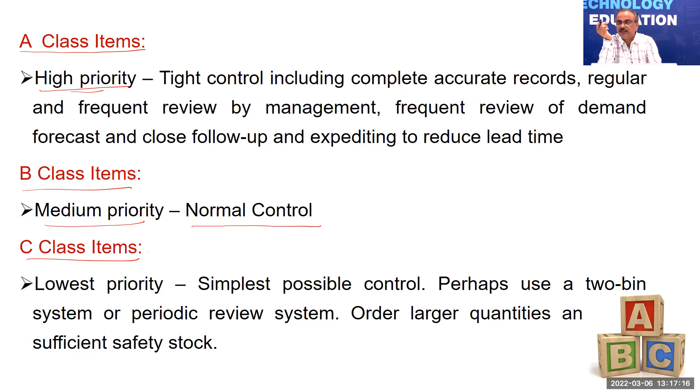So for example, in any industry, there will be certain spares which will be having a very high value. So those items can be classified as A class items. There will be certain items which have a medium priority, and we can have a normal control on those. And there will be C class items which we can give the lowest priority. For example, nuts, bolts, washers, or any other consumables, those can be classified as C class items. So ABC classification classifies the item based on its usage value.

Okay, so I will share this so that you can go through it, and we can see how we can do the ABC analysis. Okay, so let's look at this example, and based on that, how we can classify the items as a part of the ABC analysis. So let's say we have 10 items, and for each item, the price is mentioned here, and for each item, the annual demand is mentioned. So for example, C01, which is a parking thread, its price is 100 and its annual demand is 100.

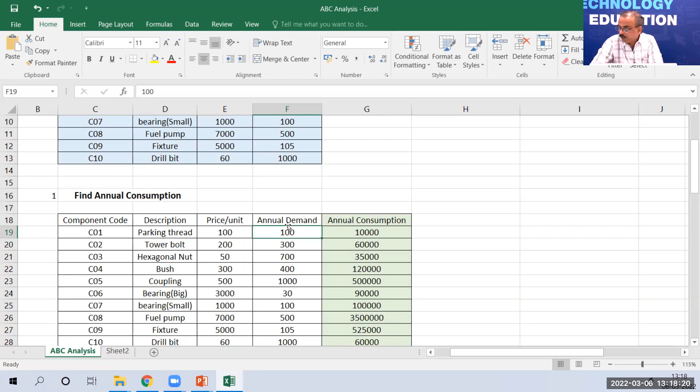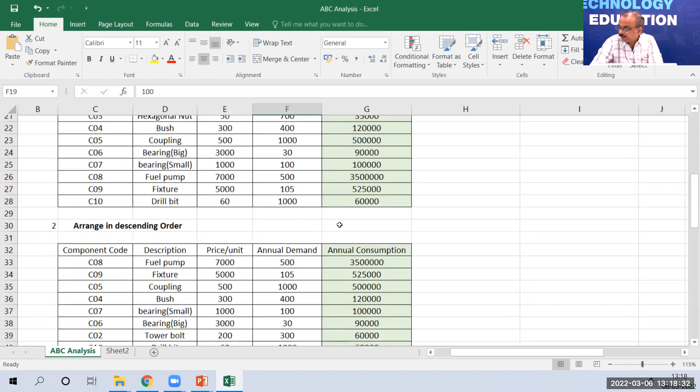So based on this, we have to find the annual consumption. The annual consumption is nothing but price multiplied by its annual demand. So if we are having an annual demand of 100 and the per unit price is 100, the annual consumption value is 100 multiplied by 100, that will get to 10,000. So for each item, we have to come up with the annual consumption. So based on the annual consumption now, we have to classify the items as A class, B class, and C class. So based on the annual consumption, you have to arrange those items in a descending order.

And then based on its consumption, we have to calculate its usage value. For example, the first component C08 is having its annual consumption of this value. And based on that, we have to find the cumulative of the annual usage value. So these are the cumulative annual usage values. And then for each item, we have to calculate the percentage as a cumulative value. For example, for this particular item, C08, its cumulative usage as a percentage of the annual value is 70%. Similarly, for the second, it is 80.5%. For the third, it is 90.5%.

So for each item, we have to find the cumulative percentage as a part of the cumulative value. And based on that, how many items are a part of this percentage. For example, just 10 items we have considered. So the first item will include 10%. The second item, 20%. The third will include 30%, and so on. So based on this, we can classify the items as A class, B class, and C class items.

For example, we can see that the first component has accounted for almost 70% of the total annual usage. So that item we can classify as an A class item. The next two items have contributed to the remaining 20%. So these two items we can classify as B class items. And then the remaining components have accounted for 9.5%. So these items we can classify as C class items. So based on the annual usage, we can classify the items as A class, B class, or C class items.

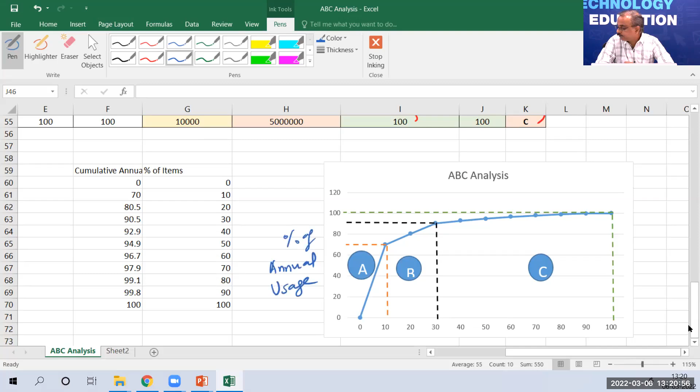And then by plotting the percentage of the annual usage to the percent of the items, we can classify the items as A class, B class, and C class. So you can see here from the plot itself, 10% of the items account for almost 70% of the usage value. The next 20% of the items account for the next 20%, and the remaining 70% of the items are accounting for the remaining 8%.

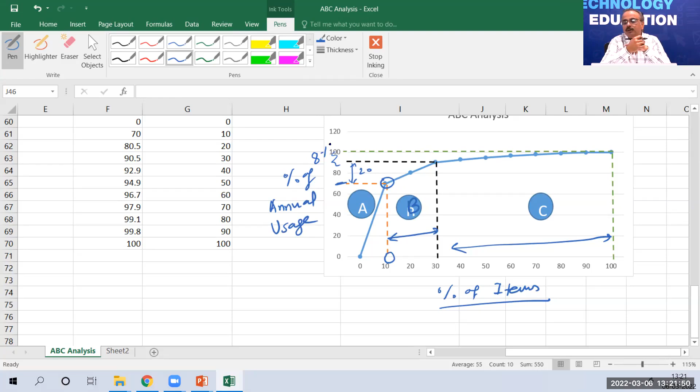So in this way, we can classify the items as A class, B class, or C class, and then accordingly we have to ensure the control over these items. For example, A class items will have to be given a higher control, B class items we can give a moderate control, and C class items we can have a low level of control.

So ABC classification classifies the items based on their annual usage value. But if we just consider the classification based on the usage value only, in some situations we can see that even though the usage value is low, the criticality may be high.

For example, if any small seal or washer results in reducing the pressure, that will result in a major breakdown for the maintenance department, which will involve too much downtime loss, which will result in productivity loss also. So even though the usage value is very small, the criticality is very high. So in industry, we should not always classify the items based on the usage value, that is ABC. We should also include the criticality of the component.

So there will be a few items which will be vital. That means non-availability of those items will entirely halt the system. There will be a few items which will be essential. Those items will not stop the system, but they will reduce the performance. Those items are classified as essential, and there will be certain items which will be desirable.

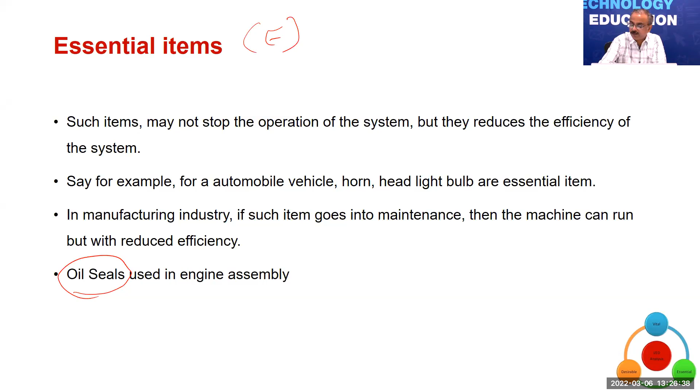Essential items are those which will not stop the system, but they will reduce the performance. Those items are classified as E items. For example, oil seals in an engine will reduce the performance. So those are E items, or essential items. And there is a third category, the desirable items. For example, in the engine assembly, the cover on the engine is a desirable item. It will not stop the system.

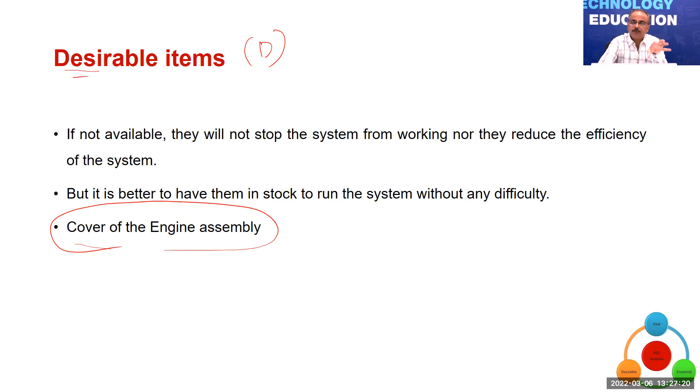It will not reduce its performance, but then it's a desirable item because that may cause accident. So in any spare part management or in any inventory system or in any items which are purchased, you should have a kind of control on all the items based on its usage value or based on its criticality. So as a practice, the single classification in terms of ABC or VED is not employed, but the combination of these two. Okay.

For example, if we consider the classification in terms of ABC and in terms of the VED analysis, we can see that this particular cell will result in the combination of A and V, that is A class items which are vital. This will result in A class items which are essential. This will result in A class items which are desirable. Okay. So we should have a control in terms of these classifications.

So there will be a first classification which will include AV, AE, AD, BV and CV. So even though it's a C class item, if it is vital, we should have a tight control on that, because even though the usage value is low, it will stop the system. So the classification should be in terms of these three categories. So AV, AE, AD, BV and CV should be given a tight control.

Then the second category is the one highlighted with a green color. So we can have a moderate control on that. And then the last, which is highlighted in terms of the D, C and D combination. So we may have some kind of a low level of control on these particular items. Okay, so depending on that, we can have our inventory policy.

For example, A class item and vital, we should have a regular stock with a constant control on that. Similarly, A class item with an essential criticality, we can have a medium stock, and maybe A class item with a desirable one, either we may have a low stock, or even no stock, because if it is easily available in the market, it will not have much impact. So based on this particular classification and combination, we can ensure the control.

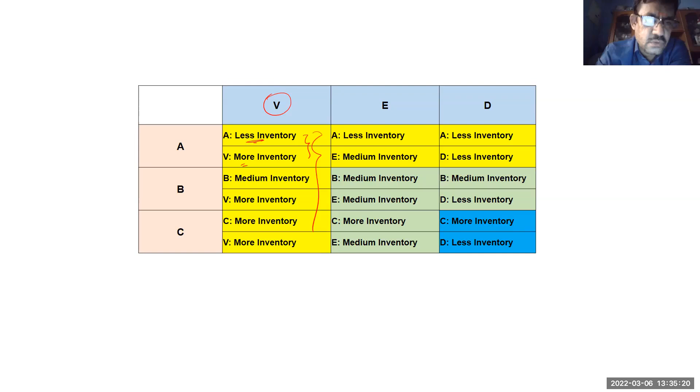Is there anything else? Scores of the last quizzes perhaps not shared, sir. No, it's already shared. Quiz 1 and 2 both? No, quiz 1 is already shared. I think others have got it. Okay, sir. See, as far as the faculty is concerned, we have just one button there, release score. When we click it, it automatically goes. So if any issue arises on the part of the Google services, we don't have any control over that. It is as good as when you click the send button in your email; what happens at the later stage you don't have control over.